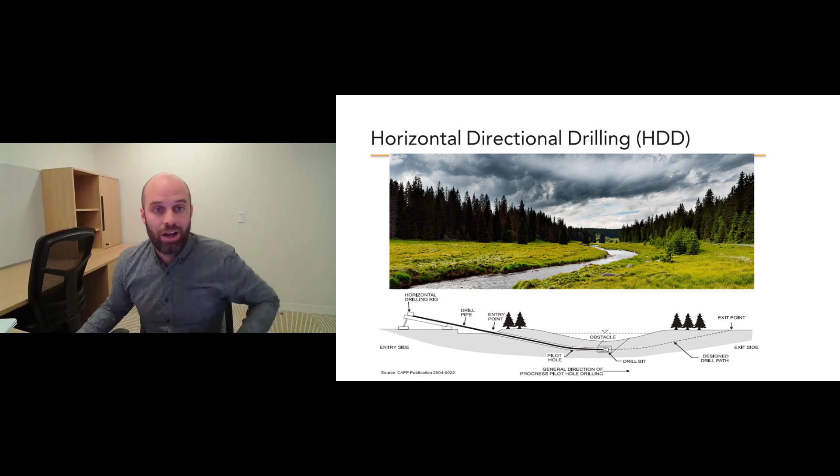However, HDDs can be pretty risky to undertake because if things go wrong and the crossing fails, the costs associated with dealing with that failure can be huge. And then if there's any delays to the installation of the pipe and key deadlines are missed, there can be even bigger costs associated with delays to the project itself.

So to avoid this, you generally want to have a good plan for your HDD, and the designers want to make sure they know what's underground and what they're likely to encounter.

I'm sure there's many things to consider, but from my experience, some of the main questions are: where's the bedrock? What's it made of? Are there any weak layers within the ground that are going to possibly cause a slope failure? Is bedrock shallow enough that I can drill into it, or is it too deep and that's not an option? But often, more importantly, are there any granular material zones, like coarse grain zones of sand or gravel or cobbles?

These granular materials can cause huge problems. They're often discovered when the HDD is being executed, and it can either cause mud circulation issues, it can collapse the hole, it can chew through bits, it can damage the pipe coating when the pipe is pulled through.

They can largely stop a drill in its tracks, and it's usually because people aren't prepared to deal with it properly when they encounter it.

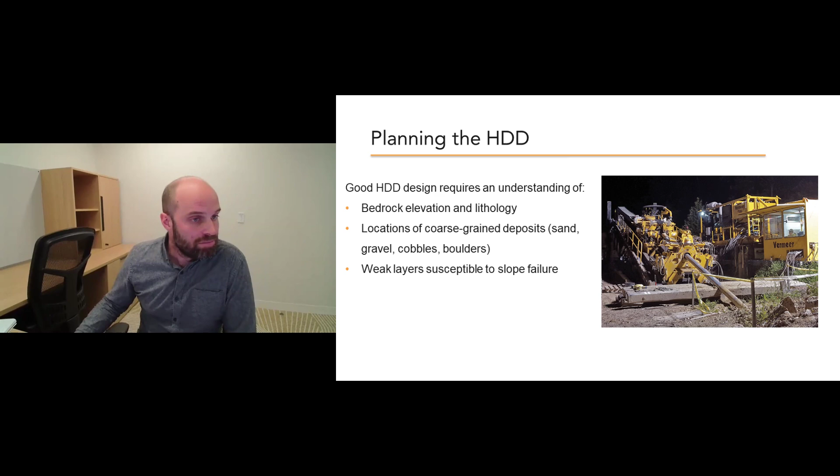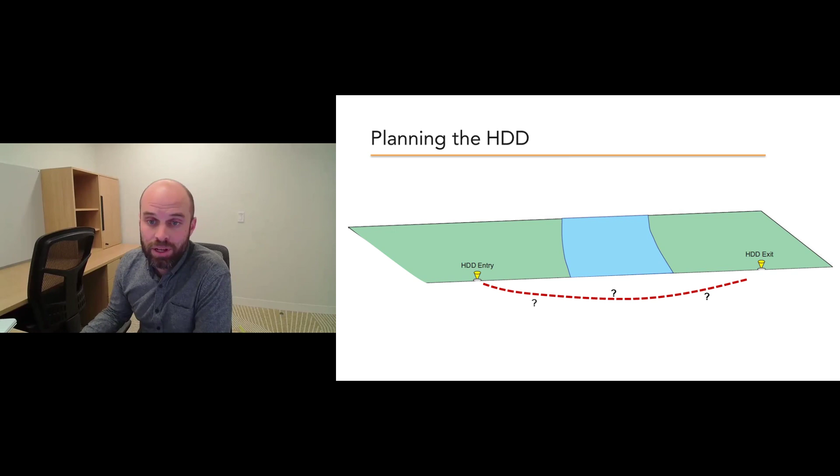Let's start with a simple example. We have this river that we're looking to cross underneath. The team is evaluating the feasibility of doing an HDD here. We have an initial plan of where we think the bore path is going to go. But to figure out what's underground, we're generally going to want to drill a couple boreholes because we need more information than just lines on a map. We'll usually drill at least two, one near the entry, one near the exit.

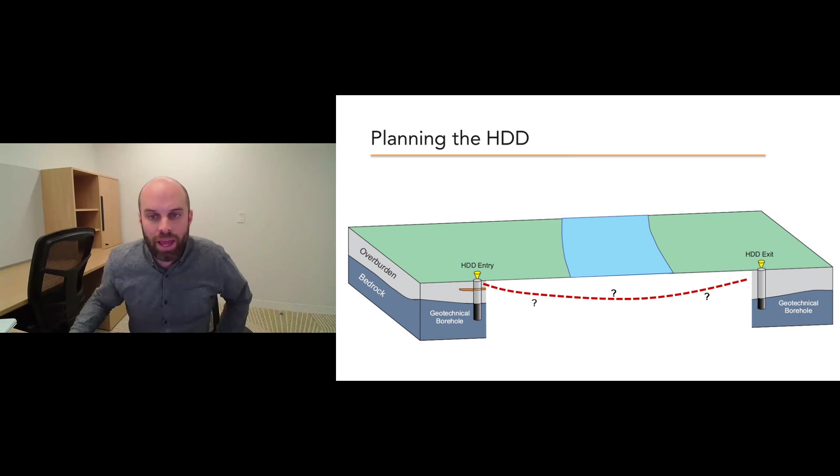From these, we can see that we've hit bedrock on either side. We can see that this orange lens by the HDD entry on the left, there's a bit of a granular zone. We'll call that orange bit granular. Maybe it's not a problem. It's shallow. We can case through that, and our bore path continues on, and bedrock looks to be a similar elevation on either side. So perhaps it just goes straight through. Looks like not so bad at this point in time.

But what if it looks like this? As of right now, we can see there's a depression in the bedrock. Scour, maybe not so hard to imagine with a river channel. There's more granular deposits underneath the river. And as it stands right now, the bore path is going through one of these orange zones. We'll call that a granular material, and that's nearby the exit. That could cause huge problems for us. And if we don't know about it beforehand, and we find that out when the drill was going through, it could cause multiple days of delays for the project.

Maybe if we knew about this information before we drilled the geotechnical boreholes, we could move our geotechnical boreholes or add one and intersect some of these questionable zones. Or maybe we know that there's these granular layers and we want to move the entry and the exit, and that means we want to move the two boreholes that we've drilled, into a different spot. So moving any of these or adding extra boreholes, these have big implications on risk and cost, and it would be good to know this information before we're undertaking this construction process.

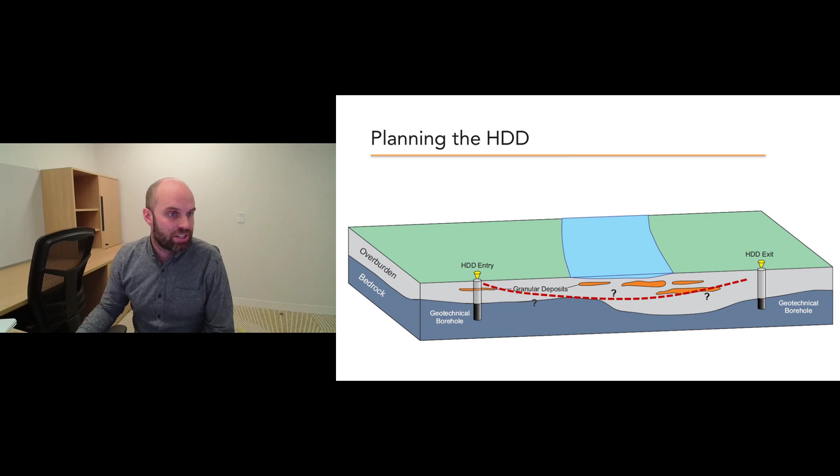So enter geophysics. Geophysics surveys offer non-intrusive methods for imaging the ground and helping answer some of these questions. I'm going to go over a few examples over the next couple slides, but in general, they allow us to measure the physical properties of the Earth and make some interpretations about what materials we're likely to encounter either when we drill the HDD or drill some of the geotech boreholes.

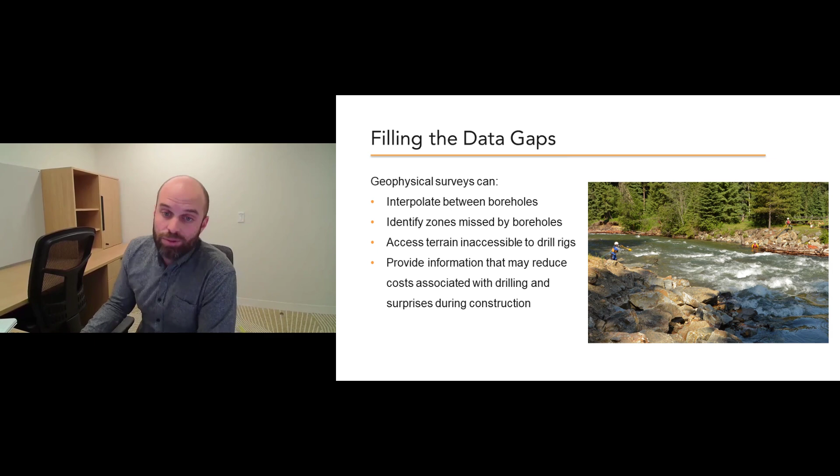For the most part, we can conduct them on foot. We can put them across streams, down steep, rugged slopes. They can provide continuous information on these rough terrain areas that are possibly not accessible to drill rigs. And by incorporating geophysical surveys into the planning stage of the project, it's very useful for augmenting information that we already have from boreholes, or helping us figure out what kind of information we want to look for with additional boreholes to make informed decisions when we're planning the construction of a pipeline.

So the first example I'll talk about is seismic refraction. Seismic refraction tomography, or SRT, is an excellent way for imaging bedrock. Some of you may have heard of it. It's similar to seismic surveys for an oil and gas exploration survey. And where these differ is that these oil and gas surveys are focusing on imaging deep into the crust, maybe not super deep, but hundreds to thousands of meters. They're optimized for imaging deeper, whereas these shallow seismic refraction surveys are optimized for shallow engineering problems.

And how they work is I have a person with a sledgehammer or a person with a small explosive, and they generate acoustic waves in the earth. They propagate through the earth, traveling up and down a string of geophones that we've laid out. Geophones are simply very sensitive microphones that measure vibrations. As these waves travel through the earth, we know the position of the sensor, we know the position of the source, we time how long it takes for the waves to propagate, and through some simple math, we can calculate the velocity that these waves were traveling.

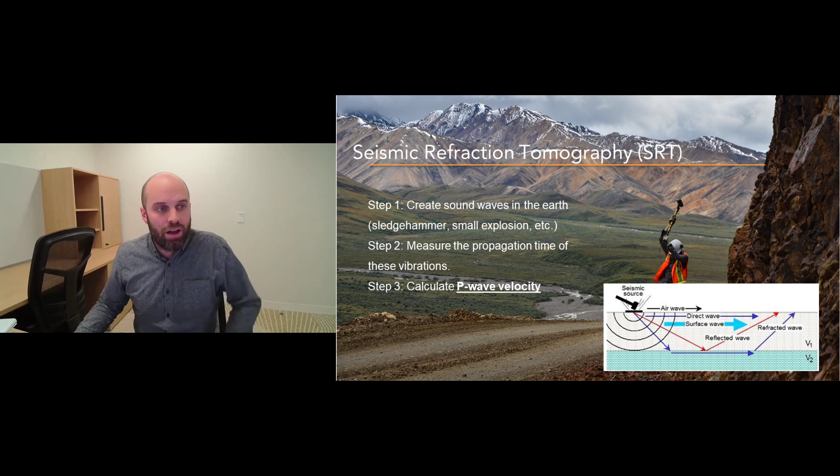Now, why do we care about this velocity? Well, this acoustic wave velocity, or in particular the P wave velocity, is directly related to how dense a material is, how compressible a material is, what are some of its mechanical properties. They travel fast through dense, rigid, incompressible materials, and they will travel slower through more loose, unconsolidated, less rigid materials. So put simply, fast P wave velocity means rigid material or bedrock.

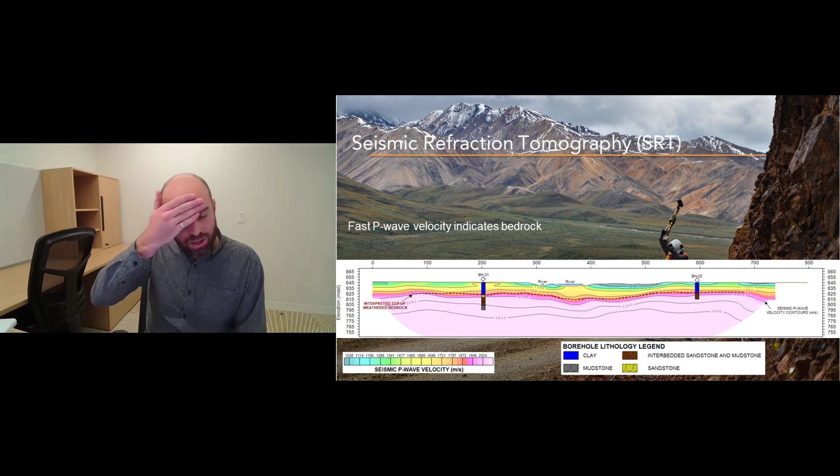Now, this is an output of an SRT survey. This is what you're likely to get when you conduct one of these. This was collected on a pipeline project that we've worked on in the past. And this is what you're looking at here is a velocity cross-section. The pink colors are fast velocities, and the blue and green colors are slow velocities. So pink is dense, rigid, incompressible rock material, and the blue and greens are the unconsolidated overburden.

And in this example, we can see that there's blue in these stick logs. The blue is clay. Those hatched materials, it might be hard to see the hatching on the bottom, is bedrock, and we've scaled it so that the pink is indicating bedrock. And we get a nice continuous profile from following along this velocity contour to see the bedrock profile underneath the river going across where this pipe is.

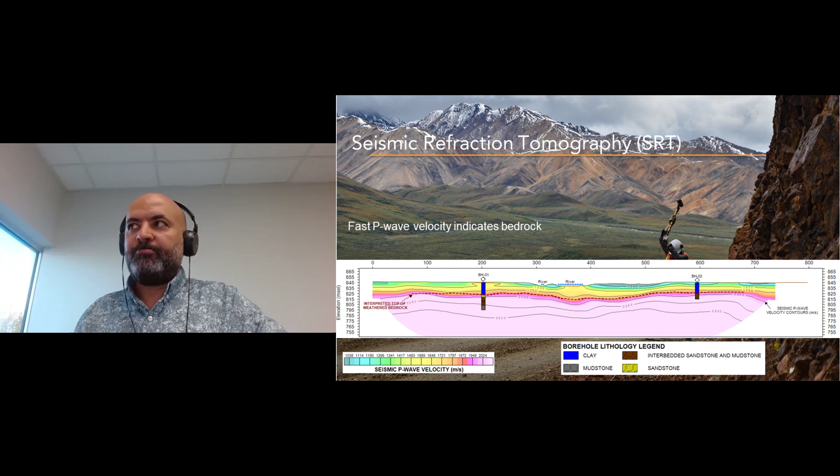Second technique I'll talk about here is called electrical resistivity tomography, or ERT. We mostly call it ERT because electrical resistivity tomography is a mouthful. And it's very simple. It works similar to voltmeters that you may have used in the past.

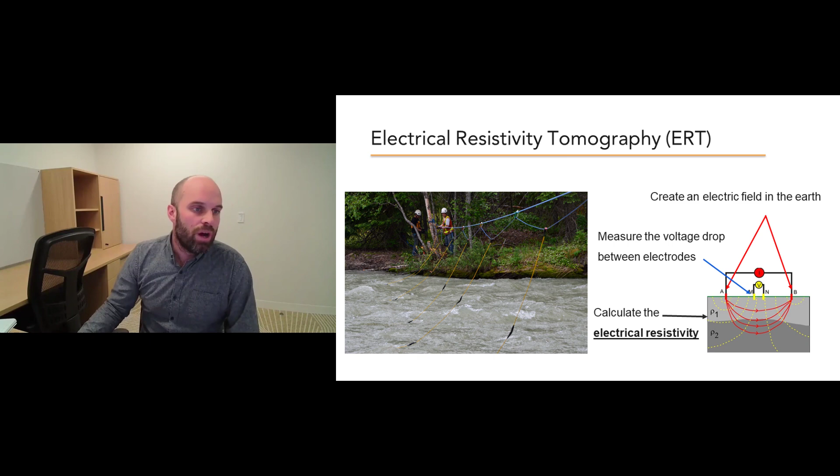What we're doing is we hammer in electrodes into the ground. These electrodes are just stainless steel rods. We create an electric field by applying a voltage between them. And using another pair of electrodes, we're measuring the voltage or potential difference in different areas within this electrical field. And through some simple calculations, we can calculate the electrical resistivity of a material.

Now, in practice, what we do is we lay out a cable with many different electrical takeouts, and we hammer in many different electrodes into the ground and connect all these to a central computer, which then picks different pairs of electrodes to survey. And it just so happens that if you put your electrodes close together, it samples shallow. If you put them further apart, it samples deeper.

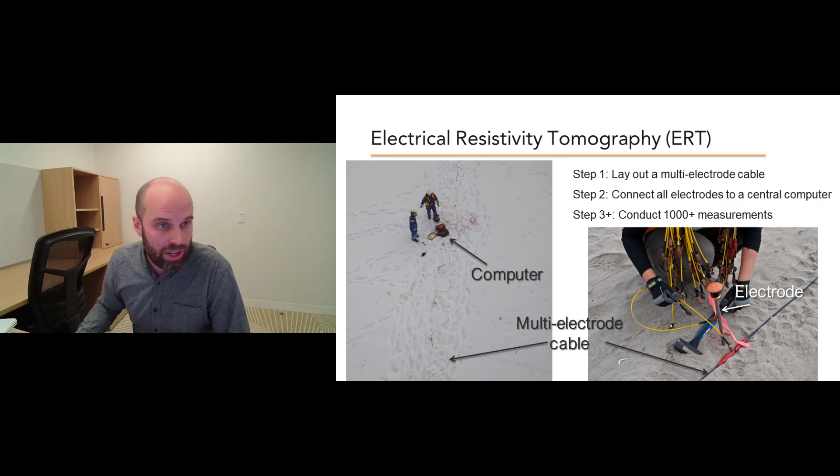With this, using the ERT in conjunction with the boreholes and with previous knowledge of the site, we can make some pretty informed decisions and make a continuous profile of interpretations in between these boreholes.

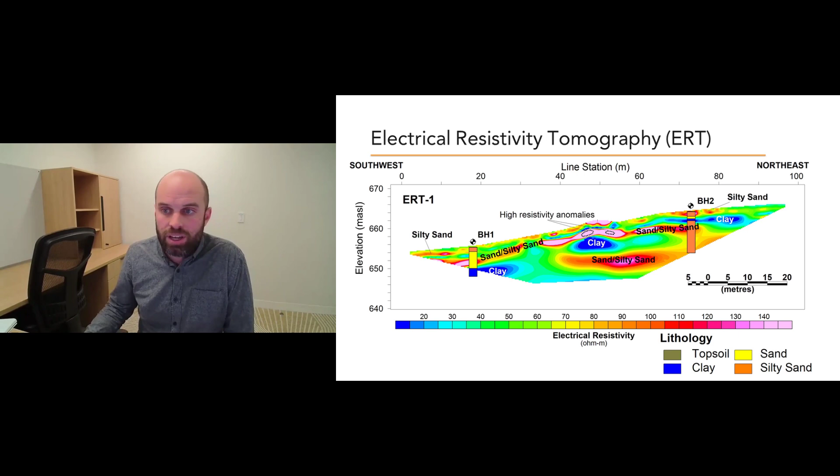Both ERT and seismic surveys can be collected in a matter of days. This particular survey is 100 meters long. It was going up a slope. It can be collected in a day easily. That first seismic profile that you saw was 700 meters long. It can be collected in a day, day and a half, depending on the resolution required for this particular survey.

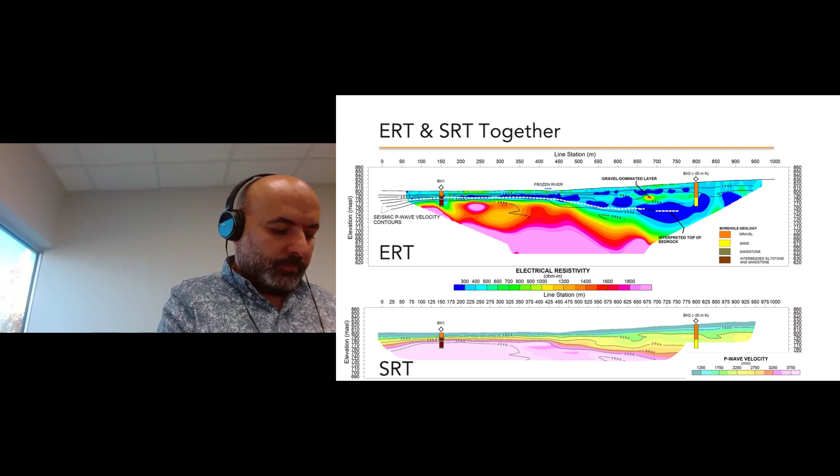Often, we would recommend collecting them at the same time. Top, we have an ERT profile. Bottom, we have a seismic profile. And the reason why we want to collect both at the same time is because they give us different information. The seismic survey tells us more about the mechanical properties, i.e. how rigid, dense material may be.

But it turns out that gravel and sand and clay all have a pretty similar level of compaction and strength, at least in terms of the P wave velocity. So gravel layers and sand layers aren't as apparent on seismic, whereas they will have quite a bit different electrical properties. So by doing them together, we can map out these coarse grain layers with the ERT, show where they are above the bedrock. So we've picked bedrock from the seismic. We put that on. You can see the white dashed line on the top is the bedrock interpretation from the seismic.

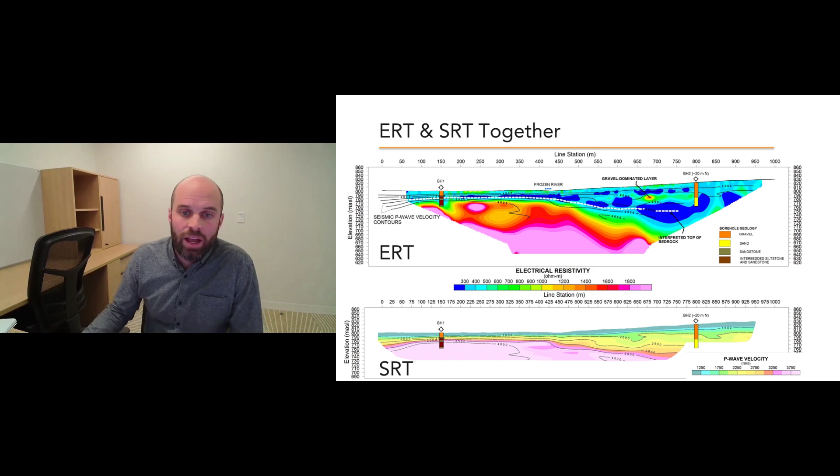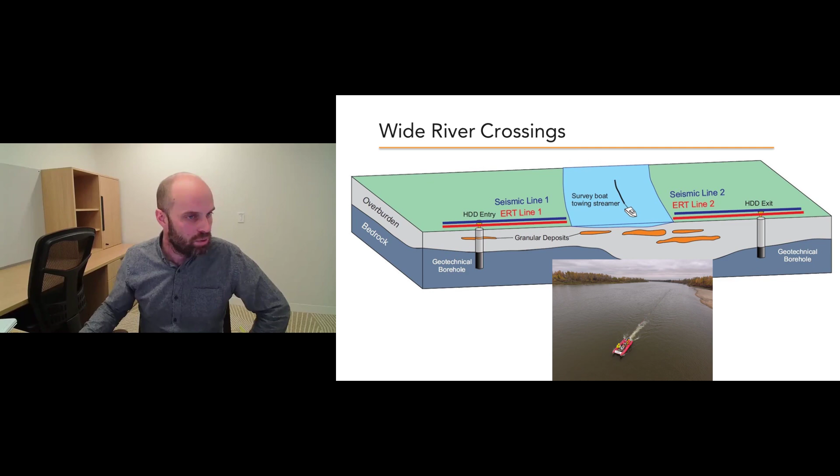The waterborne ERT and waterborne seismic work basically the same way, except instead of planting geophones and electrodes into the ground, we have a streamer with electrodes and geophones integrated into a cable that we tow behind a boat. This boat drives up and down the river collecting a continuous profile perpendicular to the pipe crossing. You could collect it along the pipe, but with the river flow it doesn't work so well, so it's best to get many lines up and down the river.

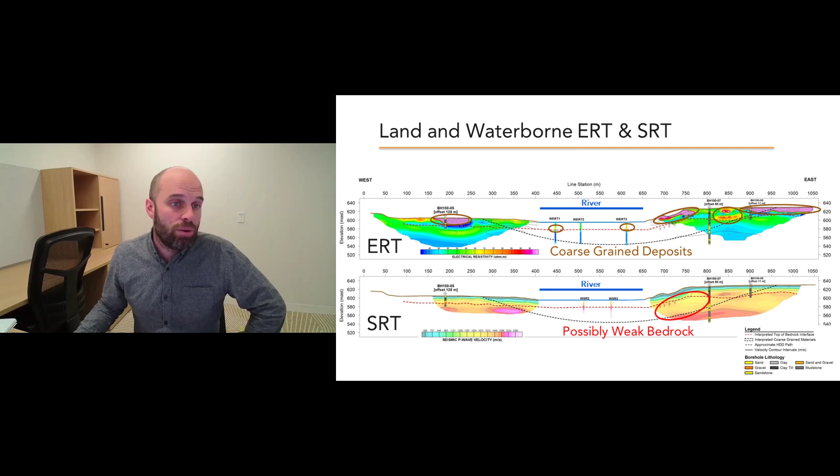We see coarse grain deposits above bedrock, with bright pink deposits near the entry and exit points, and bright pink on the slope, likely colluvium - all interpreted as coarse grain materials. On the east side of this crossing, we can see orange and yellow zones between the two boreholes, likely coarse grain materials again, very close to the proposed HDD path. This might be information we want to know before we start drilling.

Underneath the river, we can see increased resistivity layers in the waterborne data, but those might be less of a problem because the HDD is way underneath it. In the seismic, the waterborne seismic is excellent for picking the bedrock here, showing very clearly where bedrock is underneath the river.

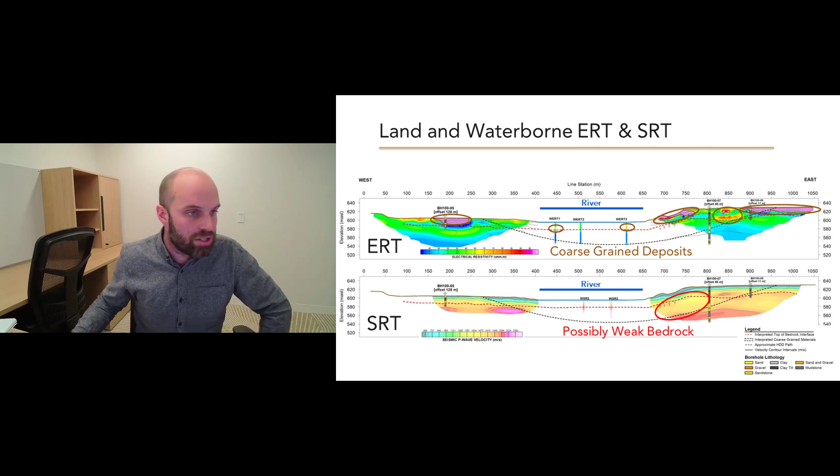On the right side of the crossing, this zone I've highlighted as possibly weak bedrock - we know it's bedrock from the borehole right next to it. But in the seismic, the P-wave velocities are quite slow in this area, which may indicate these are possibly weaker areas that could have geotechnical considerations for potential slope failure.

Another thing we can do on these pipeline projects that's not necessarily HDD but is quite helpful, is mapping organics layers. Often organics layers are mapped by test pitting, going along with a backhoe and digging to see how thick it is, but these surveys are ground penetrating radar surveys.

It works very similarly to seismic. The main difference is instead of sound traveling through the ground, it's radar waves traveling through the ground. When these radar waves go through the peat and hit the mineral soil underneath, they get reflected back up to the surface.

Some of you may have seen these push cart type radar antennae on the bottom left, but you may not have seen the more rugged radar antennas. It's like towing a garden hose, and you can effectively walk through most material. They're very rugged, and this survey here is a couple hundred meters long, taking as long as it takes to walk that distance.

So it's very fast, and the bottom of the organics layer shows up very clearly on these radar surveys because there's such a big difference in material between the peat and the mineral soil to the radar wave. We can get a continuous profile of how thick the organics are all along this pipeline alignment, which may be helpful for buoyancy control or material volume calculations and whatnot.

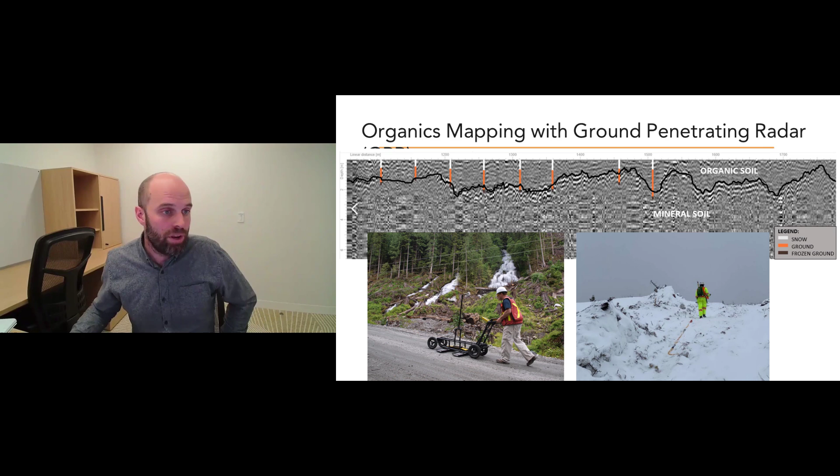A couple more techniques I'll mention that I won't spend too much time on. The TTEM, or towed transient electromagnetic survey, is very similar to ERT.

It's in some ways better than ERT. It's mobile, you can tow it around wherever you go. Where ERT needs wider cables to see deeper, for the TTEM, it's contained and you can look deep within this tight little package.

The main reason why I didn't spend much time talking about TTEM versus ERT is you need at least a 2 to 3 meter wide cut line to pull this through, because it's quite large and sensitive to metal. So if there's already pipe or metallic infrastructure nearby, say within 50 to 100 meters, or power lines, it can impact the results. So it's great for greenfield applications, but if there's infrastructure, it's maybe not the best option.

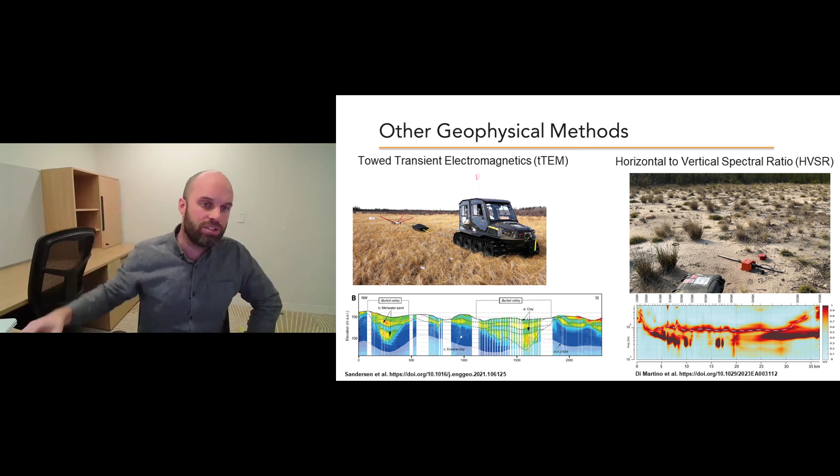HVSR is another very quick, cheap method to deploy. You plant a seismograph in the ground and measure the shaking of the ground. It's a different seismic technique, and from that you can get the shear strength or shear properties of material, and calculate bedrock depth. The drawback is you need intrusive information to calibrate the results properly, specifically shear wave or bedrock depth, in order to get that. But if you have that information, it's very quick as a reconnaissance tool to check certain areas.

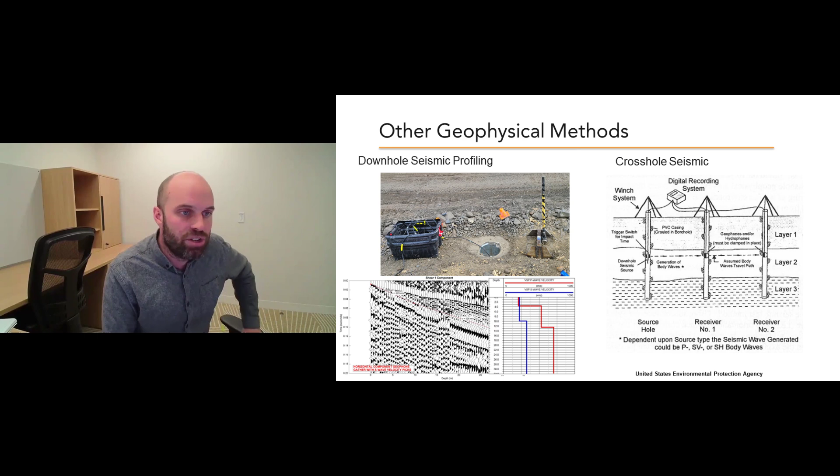Then there are some downhole methods, either downhole seismic profiling or crosshole seismic methods. These are particularly useful if you have boreholes and want to know shear strength and material within them, or if you suspect there are voids in between boreholes, you can do crosshole seismic or crosshole ERT to map these voids. Again, useful, you just need to make sure you have either some sort of instrumentation or a hole you can stick the instruments down.

So in summary, geophysical surveys can be quite useful for providing quite a bit more information than just singular boreholes. They should be used in conjunction with boreholes, I'm not suggesting they replace drilling boreholes. It's just an excellent thing to add on next to boreholes. We can interpolate things between layers that we see, and possibly identify zones that were missed by boreholes.

Ideally, these profiles can go all the way across the river or through the zone of interest. But if we need to break the line, because there's a wide river, there are waterborne techniques we can use to fill in the gaps in between. And depending on what you're looking for, there's many different applications. I only talked about a handful, but there's likely, if you can measure it in the ground, a geophysics survey that is able to provide a map of where that particular zone of interest is.

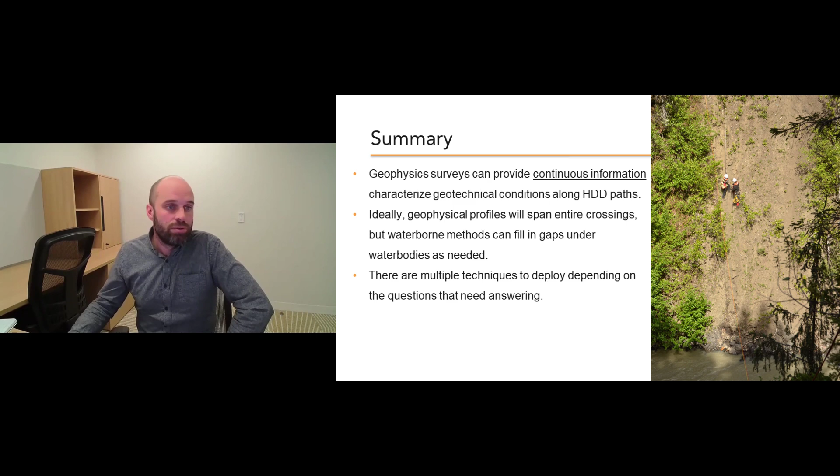Perfect, thank you so much Max for the presentation and the good information there. It looks like we already have a few questions here. First question is how far away the borehole should be from the drill path? Asking because if the borehole is too close, it could itself become a frack out risk.

This actually might be a better question for you, Tamer. I don't drill the boreholes too often, but in terms of how far do you need the borehole away from the geophysics to help the interpretation? That's more dependent on how quickly you're expecting the lithology to change laterally. If the borehole is 10, 20, 50 meters away, we can sort of extend, especially in the Western Canadian Sedimentary Basin, it might be similar. However, if there's small sand and gravel pockets, you might miss those.

So you can possibly chime in on the frack out risk. No, you're right, and it has to be off the alignment of the pipeline, enough distance to make sure the risk of frack out is minimum. So thanks for your answer.

Second question is, how does the water table affect the results of an SRT survey?